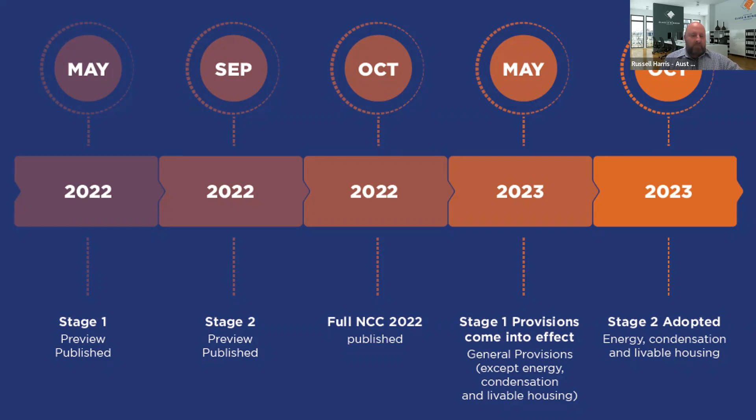So it's currently available and can be downloaded from the Australian Building Codes Board's website. The transition plan agreed on by the state ministers was for an implementation, or mandate, coming into effect as of 1st of May for all provisions except for energy, condensation, and livable housing. Those elements would have a delayed adoption to the 1st of October 2023. So effectively a 6 and 12-month introduction. Now, that's not to say they can't be used at this point. NCC 2022 is in effect, but it's not mandatory. So the easiest way to say it is compliance with NCC 2022 at this moment is voluntary, but will become mandatory as of the 1st of May, at least according to the building ministers meeting.

But Australia is based on a federation, which means we have 3 levels of government: federal, state, and local. And the National Construction Code is brought into effect by state legislation. It's not a federal document, even though it's called the National Construction Code. It's brought into effect by state legislation and can be varied by state. So what we now have is a federal transition plan, but we have state variations or state announcements as to what their intentions are.

So what you can see here is that Queensland and Victoria have gone on the record and announced that they will adopt the national plan, so 1st of May adoption for all of the general provisions. We've called them general provisions because it's too hard to say everything but condensation, energy and livable housing. So the general provisions is in May, and the 3 elements, condensation, energy and livable housing, in October. New South Wales is following the same plan, but has opted out of the livable housing provision, so they will not be adopting livable housing in NCC 2022 as a state variation.

Tasmania have a similar kind of variation. They will also adopt the general provisions in May. The condensation provisions will be adopted in October as per the national plan, but there will be a further 12-month delay on the livable housing, so October 2024, and they will not be implementing the energy efficiency provisions.

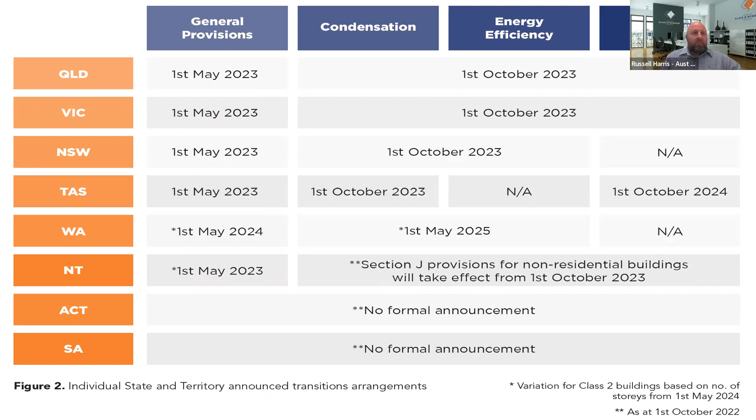So what are the key changes? The first thing you notice is that there's 2 new books. The NCC itself is still 3 volumes - volume 1 and 2 making up the Building Code of Australia, and volume 3 being the Plumbing Code, not of any significance to us. But there's 2 new supplementary standards: the first one's called the Housing Provisions Standard, and the second one's called the Livable Housing Standard.

You've heard me talk about the implementation of the livable housing, so we'll work through what the requirements are in each of those. With regard to the housing provisions, the Housing Provisions Standard is all the stuff from volume 2 that was very prescriptive - all the diagrams, the illustrations, the recipe-type provisions - they've been moved out of the National Construction Code into a separate standalone document called the Housing Provisions Standard. So basically not everything, but the majority of Section 3 from the old 2019 has moved out to a separate document, and we now have NCC Volume 2 as Section H. It's no longer referenced as a 1, 2, 3 - it's now Section H, nice and easy to remember because H is for housing.

Within that, we've also got what the ABCB call the SPTC referencing structure - a new clause nomenclature. We used to have F1.6 or B8.9 and so on. There's now 4 digits to every clause, and it sounds a bit R2D2-C3PO-ish, but every clause has a specific reference structure that tells us quite a bit of information. One thing to note is in NCC 2022, on the right-hand side, you can see the previous reference - this particular clause is now F6D3, previously known as F6.2.

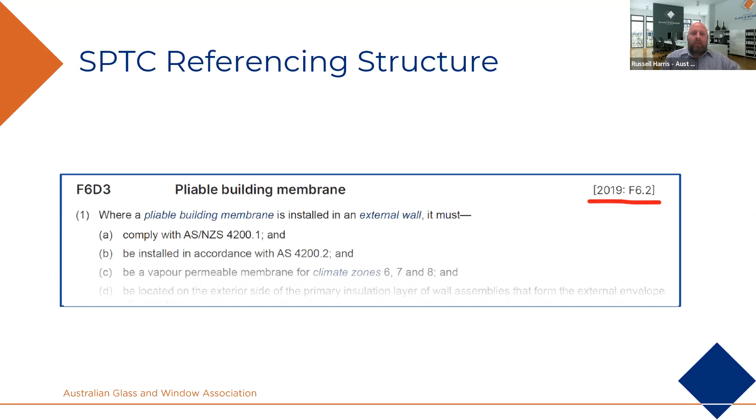So what does SPTC stand for? Section, Part, Type, Clause. The section's fairly straightforward - we all know what sections A, B, C, D, E, F, G, H, I, J all are, and section H is now the housing volume, the bulk of volume 2. The part is just the part numbering, so that makes sense. The type is a new addition - that's the bit that's most valuable and newest. It's basically that you can be O, F, P, V, D or G. The most obvious one is P, which stands for a performance requirement.

So this is the mandatory thing that you have to meet. Anything that has a P there is the governing principle or the requirement. A D indicates a deemed to satisfy provision, so we know that's a deemed to satisfy solution. Having that clarity to differentiate what is a performance requirement, what is a DTS solution, what is a verification method - these are all very important things that were kind of unclear under the old structure. So it's good to have that clarified. And the clause is obviously just the specific clause referenced.

So this is quite a powerful kind of nomenclature. It does make sense once you get used to it, but it does take you a little bit of getting used to.

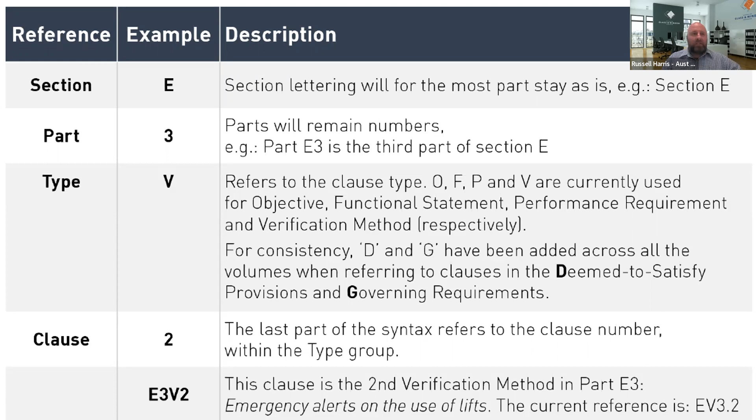Other than the general principles or things that have changed everywhere, there are 3 specific areas. We want to start with livable housing because that's not being implemented in every state, but it is being implemented in most states.

It invokes a couple of changes to be aware of. The first one is in terms of application. Livable housing by definition means a dwelling - it's applicable to Class 1A buildings or houses and Class 2 sole-occupancy units. There are already accessibility requirements that relate to other building classes, but livable housing relates only to these 2 classes of buildings.

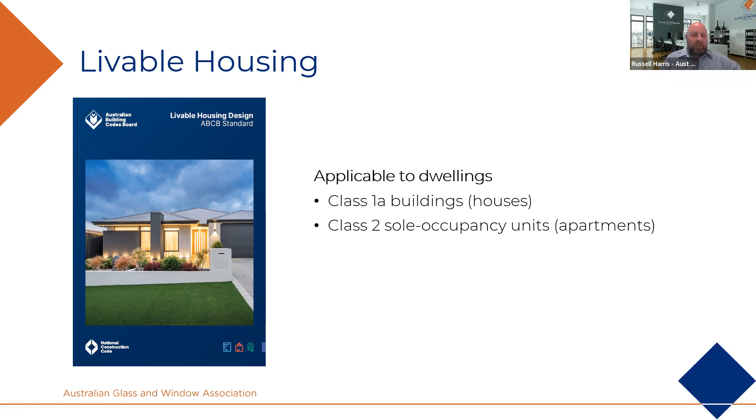The first and most notable requirement from livable housing relates to a step-free entrance - fundamentally the threshold. In every dwelling that's not exempt (there are some exemptions from the livable housing provision), the livable housing provisions require at least one step-free entrance into the dwelling. That means basically from the front boundary of the property right through to the internal of the home needs to be step-free, so someone can access the home without having to step up a step or a series of steps.

That can also mean access from an internal garage within the building. So if it's not practical to have the front door accessible, an internal access door would suffice.

The requirements relating to that step-free entrance - and there only needs to be one - is that the door threshold has to be level. If it can't be level, it has to have a height of not more than 5 mil, provided it's rounded or beveled. You can see the kind of language here - it's very standard-ish. It doesn't tell you how to do it, but it tells you what must be done.

If there's a rise in height, it can't exceed 56 millimeters, and the gradient for the threshold needs to be no more than 1 in 8.

This last dot point at the bottom was added late, based on feedback from, among others, our industry, around concerns that these provisions might compromise the weatherproofing of a front door or any door. So additional concessions have been provided around a maximum 15 mil lip. The term 'lip height' isn't something we would choose to use, but it basically refers to a vertical height of no more than 15 millimeters, where none of the other options meet the weatherproofing requirements.

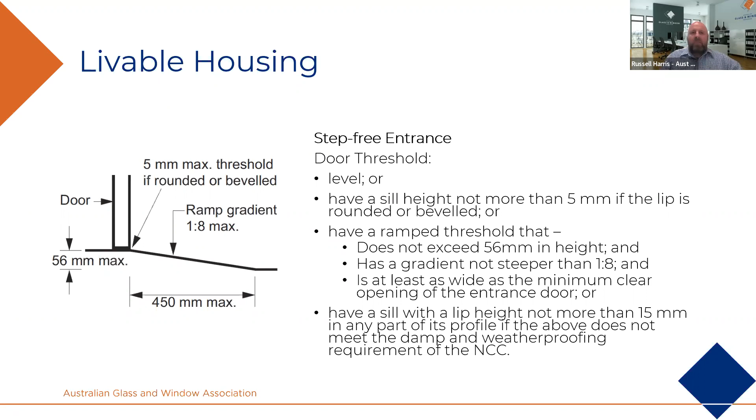The other notable thing about a step-free entrance is a minimum clear opening width of 820 millimeters. That doesn't mean an 820 mil door - you'll need a larger door because you need to account for the hinge, the thickness of the door panel, plus any hardware and protrusions of the jamb. So generally speaking, probably an 870 minimum door, but it's important to verify that.

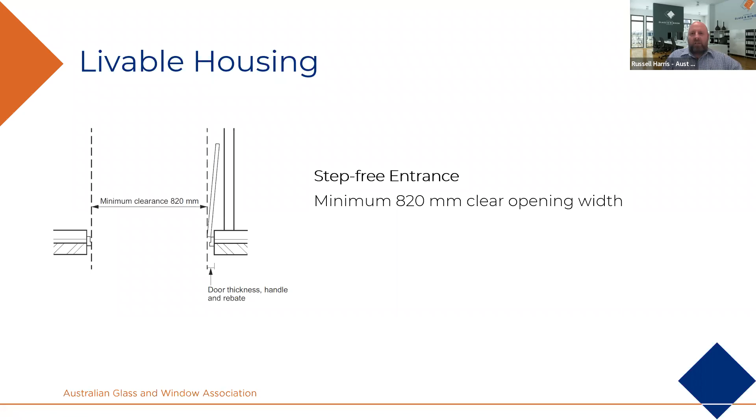One thing we've had clarified - it's not represented in the livable housing standard, but has certainly been communicated to us - is that this doesn't include the door furniture or door handle if the door is able to open past 105 degrees. In this drawing, you can see the door laid back against the wall a little bit - where you can open the door past the 105 degree mark, you don't have to account for the door furniture.

The other thing that's been added, post-public comment, was with regard to the weatherproofing of the opening and a requirement for a threshold grate.

This is the illustration that's been included. We have raised some concerns about this, mostly with regard to the size. A 200 by 150 mil drainage channel is huge. It's the sort of drainage channel you'd see in a Westfield car park, to be honest, not necessarily across the front door of a home.

But this is the requirement that's been drafted and now enacted into the National Construction Code. So yet to see the impact of this, but other than the overall size, the grate requirements are somewhat consistent with 1428.

The other thing is, other than a sliding door, it's not common for the window or door supplier to provide the drainage grate. So this may or may not affect us, but that depends on the business model and the products in question. Something to be aware of, and keen for feedback if this affects you, and what messaging and response we can take to government in response to this provision.

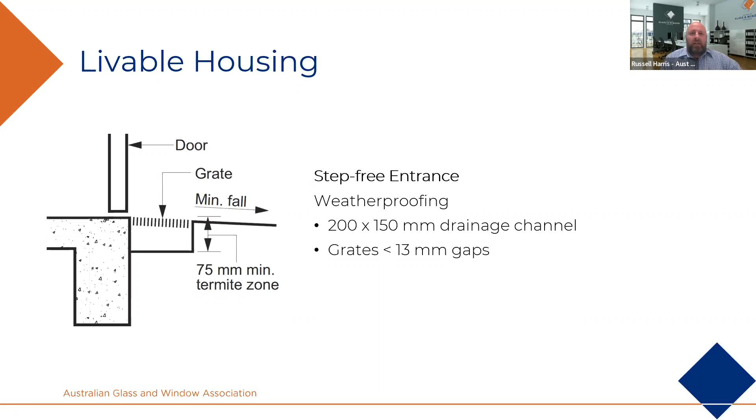As I said, it did come in quite late and without notice. The other part of the livable housing provisions or standard relates to the shower. So there's really only two parts that affect us, the step-free entrance and the shower.

And the requirements that relate to a shower, we did have originally in the first draft a requirement for the door of a shower enclosure to be removable. That has been taken out in response to the feedback the ABCB received, notably from us. But the hobless and step-free entry has remained.

Now, there's no requirement for it to be a downstairs shower. It just says at least one shower in the dwelling. It can be a source of confusion if someone who has limited mobility is able to navigate 17 rises in a flight of stairs, but can't step over a 5 mil lip into the shower. But nonetheless, these are the requirements.

So at least one shower has to have a lip height of not more than 5 millimeters, and that's hobless, step-free. So the inside and outside needs to be the same height with no hob in between, or at least not more than 5 millimeters. Really important to note. And again, it likely doesn't affect us too much, but like all things, we're going to get caught up in it.

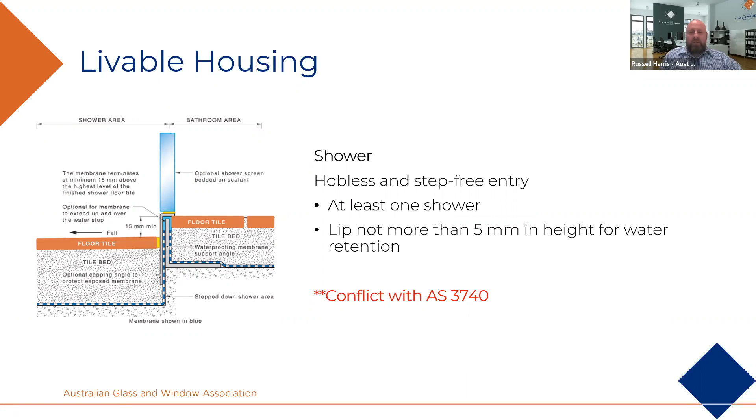Again, we're going to come in and put a shower screen on top of whatever they put down before us. So presumably it's not going to affect us too much, but it'll be interesting to see how this plays out, and likewise interested for feedback on how this may be affecting you.

Aside from livable housing, probably the next biggest change is energy efficiency. I think Clinton's going to talk later in the presentation more about some of the impacts we're seeing in some of the studies and investigation we're doing to try and understand exactly what 7-star means in each climate zone.

But generally speaking, NCC 2022 introduces a 7-star stringency level, so that's a 1-star increase from the previous. To unpack that a little bit, we need to look at the two different volumes. So we'll start with Volume 1, which is commercial buildings.

In NCC 2019, the only pathway for Class 2 single occupancy units is an energy rating or a NatHERS assessment. So there's no other pathway available currently. So that's quite restrictive, I imagine.

So a lot of the changes with regard to the commercial side of things, with regard to Class 2 apartments, is to introduce the other pathways that are available for pretty much any requirement under the National Construction Code. So basically we have performance solution versus deemed-to-satisfy solution.

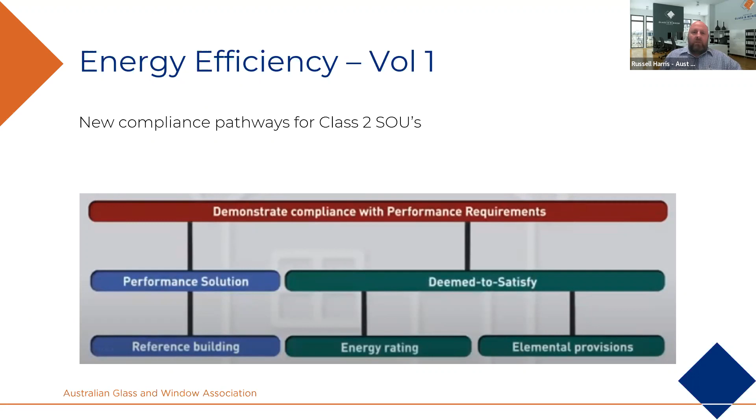I'm sure most people would be familiar with this. As it's applied to energy, performance solution generally invokes a verification method, or in this case, most commonly a reference building. The deemed-to-satisfy solution includes new provisions for elemental provisions, so kind of prescriptive building block type solutions. Those are the two areas that have been introduced, and I'll go through each individually.

So starting with the verification methodology, verification using a reference building - get used to the J1V5 reference. I imagine this method has proven quite attractive for ESD consultants in the commercial space, and it's reasonable to expect it'll be similarly popular for ESD consultants designing apartments. So we expect this to be used a fair bit.

The idea of a reference building is that you build a building that complies with the elemental requirements, and then you design your building to achieve that or better. But it gives you a lot more flexibility to mix and match and try different things. In the development of the verification methodology, the ABCB and the working groups we participated with were very, very careful to eliminate opportunity for gaming.

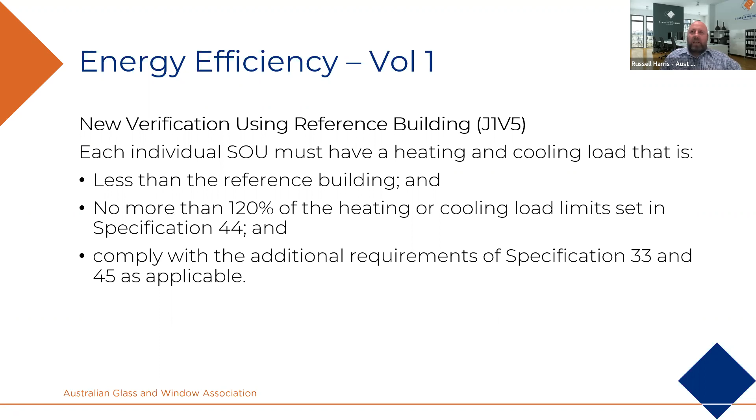The verification methodology is prone to gaming. It can be misused, so there's been a lot of effort put into the specifications that support it. Primarily, the specifications dictate a minimum stringency level equivalent to 7 stars, while allowing flexibility to design your building as you see fit. This doesn't necessarily directly involve us or change how we do business. We're still going to get specifications in terms of U values, solar heat gains, and so forth.

This is more about how those numbers are derived or how the building assessment is undertaken. Similarly, the elemental provision, the opposite end of the spectrum, is an algebraic equation that defines energy efficiency performance stringency levels. It's complicated, basically complex. This is the winter formula. If you want to game it, have a go. For us mere mortals, we'll probably sit back and watch, but there are a few notable factors in there.

One of them is that the windows in bedrooms and living rooms are treated differently, based on their occupancy. Bedrooms are typically inhabited at nighttime, so the solar gain is not as consequential to the overall energy use of the building or unit as it is for living room areas, for example. The color of the window frame, like the wall and the roof, can make a big difference to the energy performance, so that's taken into account.

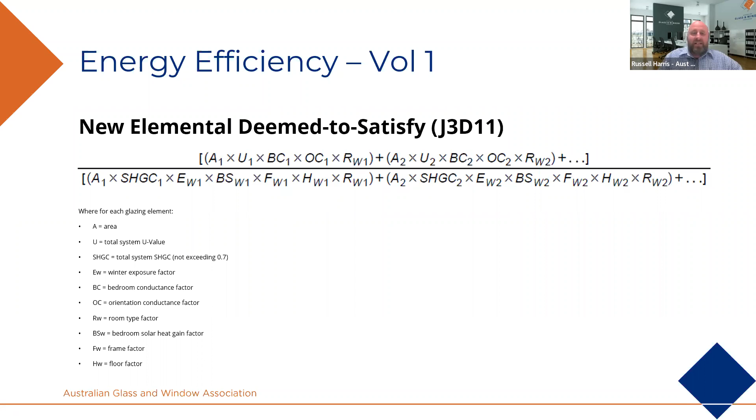And also the orientation factors - I can't remember what they all are, but it's a complicated formula and I'm not going to go through it right now. I don't pretend to understand everything in there exactly how it works, but it has corresponding summer values - this is the solar heat gain values. Again, it takes into account the room type factor, which is its use factor, the frame factor, and the floor area factor.

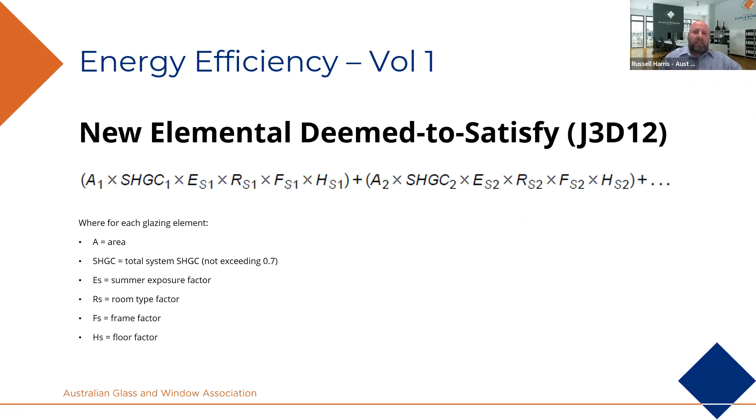In terms of volume 2, we had a pre-existing VURB, so there's currently a verification using reference building method available in 2019. It's not changing - the VURB itself isn't changing. What is changing is the increase in stringency to a 7-star equivalent, but also a tighter specification of what the reference building has to be. Fundamentally, the reference building now needs to meet the DTS provisions, and that's something that was not well aligned in 2019.

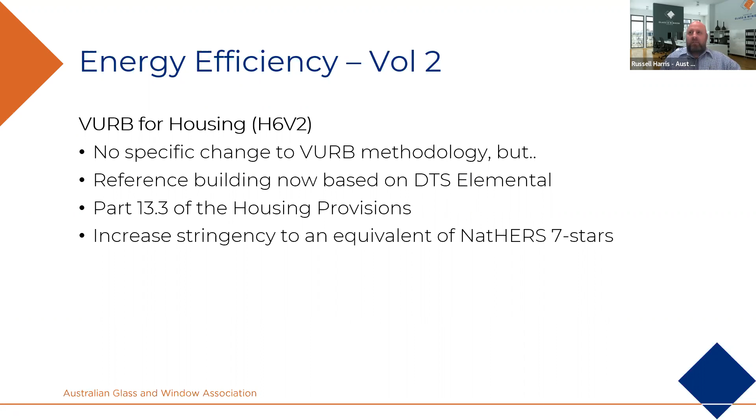So that's the improvement there, I suppose - the expectation is that buildings designed to a reference building will be much closer to either the elemental provisions or the NatHERS assessment than they were previously. That can mean a fairly sizable stringency increase for some jurisdictions where the VURB has been the preferred methodology over NatHERS.

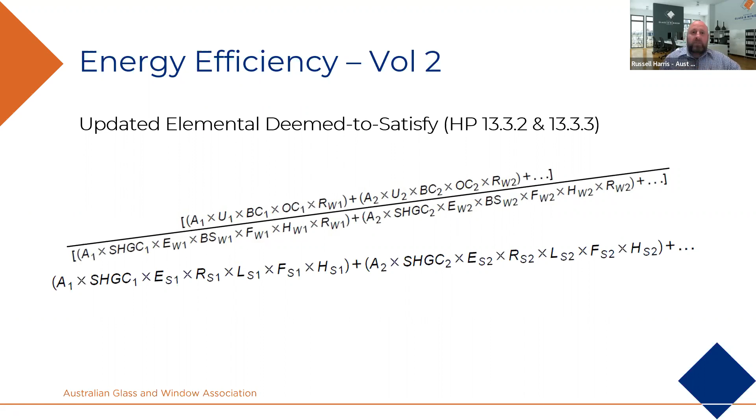Likewise, the elemental provisions have been updated - again, a whole heap of algebra and specifications there. We don't need to know all this sort of stuff; this is just how the numbers are calculated and determined by ESD consultants. The important factor is that the outcome of these formulas increases stringency to 7 stars, above the current stringency level of 6 stars. What exactly that means will depend on a whole heap of factors that Clinton's going to discuss coming up.

As for the general provisions or other matters, there are a number of corrections or improvements that have been made. One of the most notable is the inclusion of aluminium and construction packers in the exempt building elements under C2D10, the old C1.9. This refers to non-combustibility of walls and their components in Type A and Type B buildings. Previously, aluminium was not listed as an exemption, so we had to prove that aluminium didn't burn. Likewise, the packers we commonly use in installation are flammable, but very low mass and inconsequential to the fire protection measures or intention behind the wall, so they've now been exempted.

Really important - we're going to share more information on this, with better detail in a fact sheet in the next few weeks. But an important thing to note regarding balustrades is the face-mounted type. There was a misinterpretation or loophole in the previous provisions where the 125 millimeter maximum gap applied equally to any gap. This could lead to a standout face-mounted balustrade being stood off the face of the slab by 125 millimeters, creating a 125 millimeter gap straight down.

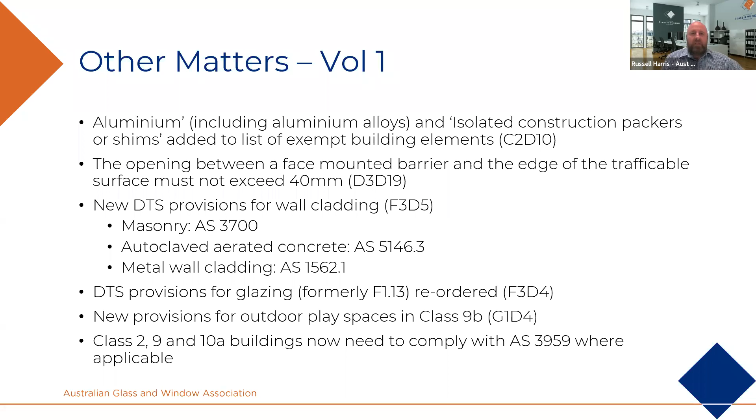In volume 2, so housing, there are some new installation details for solid core masonry. So this is single leaf. This is mostly going to affect I guess the far north Queensland style construction, Townsville, Cairns, so forth, where we have sort of solid core or single leaf masonry construction as the most common or typical construction methodology. Pretty much aligned with standard practice. I don't think that invokes any significant change. I think it's just more a formalisation of what most people are doing anyway, hopefully. They're certainly consistent with the advice that AGWA has provided in the past.

We have some new provisions covering the installation of windows. Again, they should be nothing new. These are all fairly common sense, straightforward things that relate to minimum gap criteria, transfer of building loads, flashings, things like that. They're general requirements that would apply to pretty much any installation and represent good building practice.

The glass selection provisions, particularly, so what is currently part 3.6, which is now moved to HP or housing provisions 8.3.3 and 8.4.2. These elements relate to glass selection. They're not new, they are currently in 2019 under part 3.6, but they have been modified and the objective behind that modification is to align them with 1288. There's been some discrepancies between 1288 and what's in the NCC in the past, and we've worked with the ABCB to correct those. We've been mostly successful. There's still a couple of anomalies, but largely inconsequential.

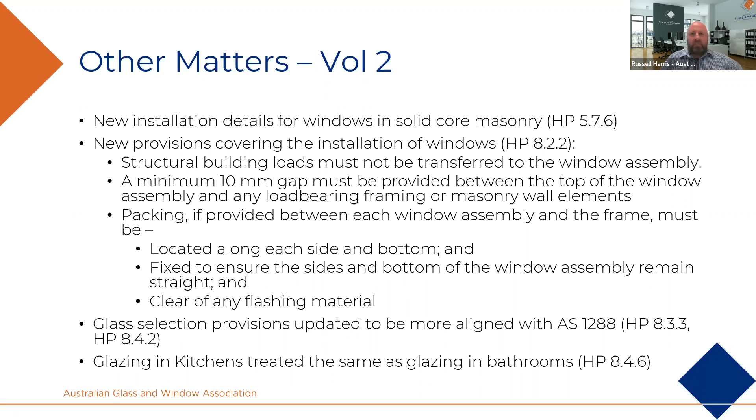This table illustrates the affected standards. What you can see is there are 5 standards, all of them with a 2021 revision - so all of these standards have been updated. The black sheep amongst them is AS 1428, Design for Access and Mobility, the disability standard. It does have a 2021 revision published, but the NCC will not be referencing the most recent revision - it will reference the 2009, the pre-existing standard revision. So that's largely inconsequential for us, but notable nonetheless.

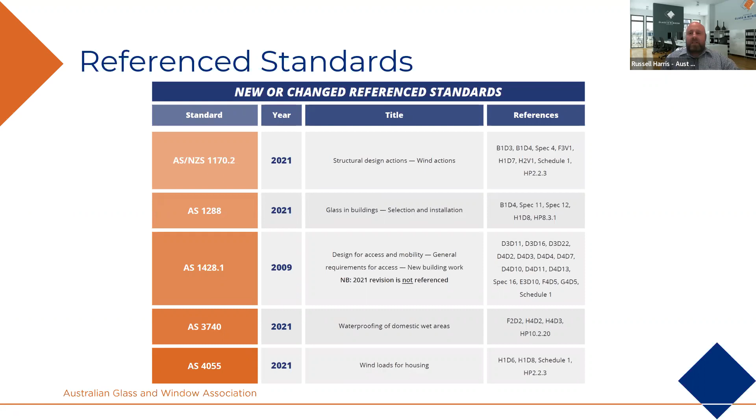With that, I'll hand over to Poya to talk us through some of the changes that have occurred in these standards. Thank you very much. Thanks, Russ. Good afternoon, everyone. My name is Dr. Poya Abtahi, and thank you for listening to this part of the presentation.

In this part of the webinar, I'll provide a brief update regarding the standards related to glass, glazing, and window industry that have been updated and referenced in the NCC 2022. As you know, AS 1288 as a deemed-to-satisfy (DTS) solution provides requirements for the selection and installation of glass products in buildings. The 4th amendment of this standard, the 2021 version, was revised and published last year, in June. The main difference between the 2021 and 2006 versions is section 6 and 7, which cover sloped overhead glazing and barriers or balustrades - these are the focus of the changes. If you're not in either of these two spaces, there will be no real effective changes for you.

The main benefit of this revision is the usability and also the new scope. For example, for section 6, overhead glazing, further clarification was provided on imposed live load requirements for overhead glazing with both less and more than 30-degree slope to the horizon. In this version, assessment of wind load on overhead glazing as a DTS solution is also included in new tables.

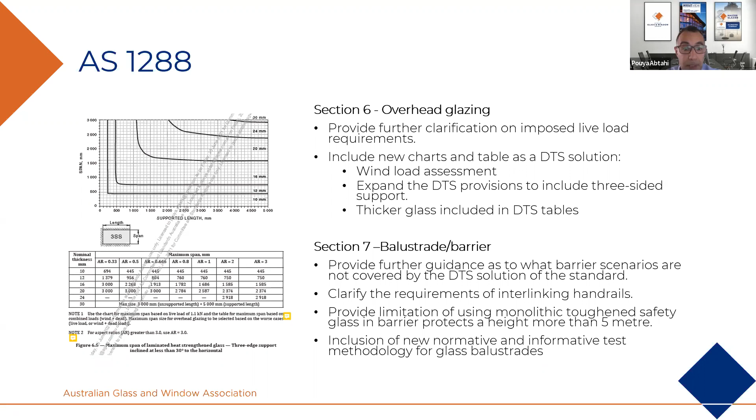New provisions to restrict using this type of glass have been added. We also added another clause about requirements of a structural barrier protecting a height more than 1 meter, referencing the appropriate test methodology to provide industry with a simple, accessible, and uniform prescriptive measure for barrier product testing. So I firstly encourage you guys to update your copy of the standard and familiarize yourself with the new provisions.

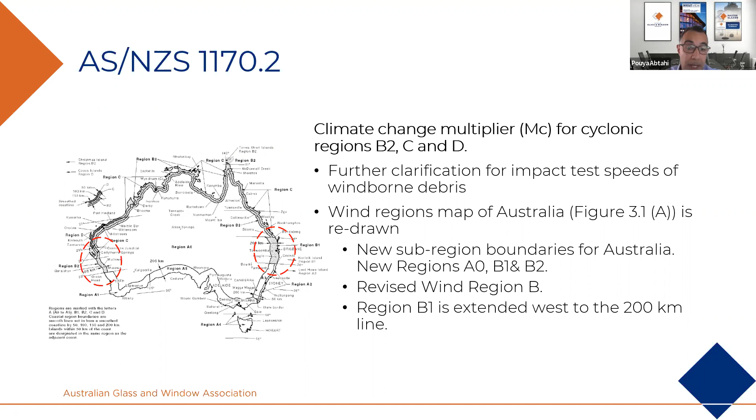Factors FC and FD for cyclone regions have been removed from the previous edition of Table 3.1. Regional wind speed for region C has been reduced by almost 5%. Wind direction multiplier, called MD, has been revised for all regions in Australia and New Zealand. Another notable change is the removal of TC 1.5, terrain category 1.5.

This means that all water surfaces would fall under TC1, terrain category 1. Therefore, as per the requirements, open terrain with few or no obstructions and all water surfaces, including rivers, canals, bays, lakes, and ocean, fall under TC1.

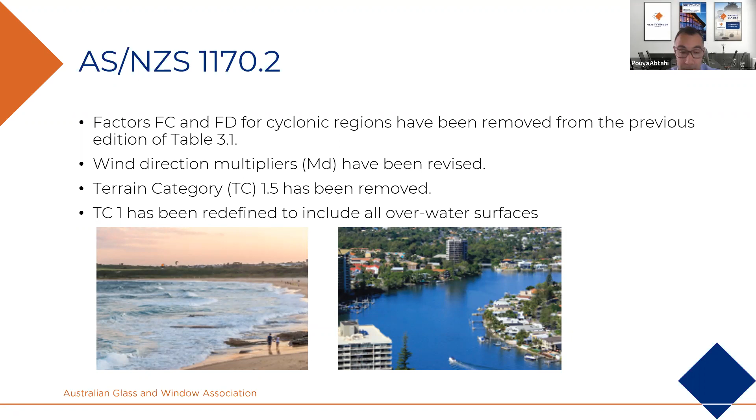When it comes to wind load assessment for a building, we tend to refer to either AS 1170 Part 2 or AS 4055. AS 1170 Part 2 is the primary wind load assessment standard, and AS 4055 is a simplified version of it, used especially for determining wind rating for housing only. Like AS 1170 Part 2, AS 4055 has also been revised last year. A lot of content in AS 4055 is reproduced from the scope of the 2021 version of AS 1170 Part 2, so they pretty much have the same scope.

One of the major changes we'll notice is that the map of Australia is also redrawn in the AS 4055 2021 version. This means region B has extended 100 kilometers inland on the east side of the country, around south of Queensland and north of NSW, and also extended further south on the west coast. I've highlighted both of these areas in red in the image. We do not have region B1 and B2 as per AS 1170 Part 2, so the map in AS 4055 is slightly different from AS 1170 Part 2.

So any development in this area will see an increase in wind load stringency. In some regions of Queensland, the wind load is going up by around 80%. That's a fairly big jump, and it's very important to understand, because it does change the outcome of the equation when you put the new numbers from the new tables in the 2021 version.

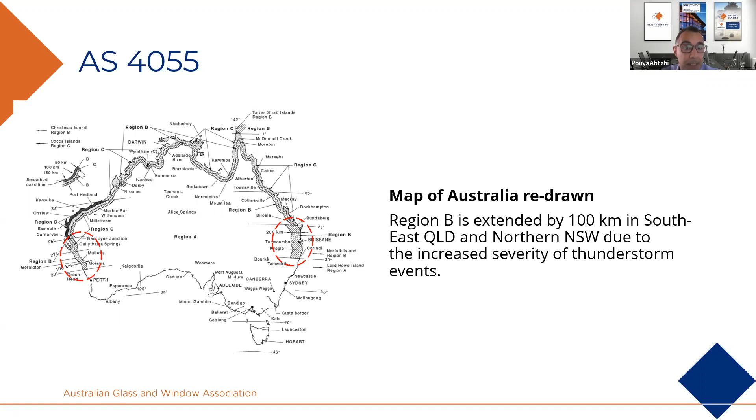Same as 1170 Part 2, TC 1.5 has been removed. Anything that was TC 1.5 is now considered TC terrain category 1, which includes enclosed and unenclosed water bodies. That's another small but significant increase in stringency, which coupled with regional mapping could mean the wind rating of many houses increases from N2 to N3, and in some cases from N3 to N4.

Further clarification of the shielding parameter was also provided in the 2021 version. If you have any questions in this regard, please contact us. We do have an in-house training course for 4055 and also the 4055 calculator, which helps with assessing a wind rating for housing.

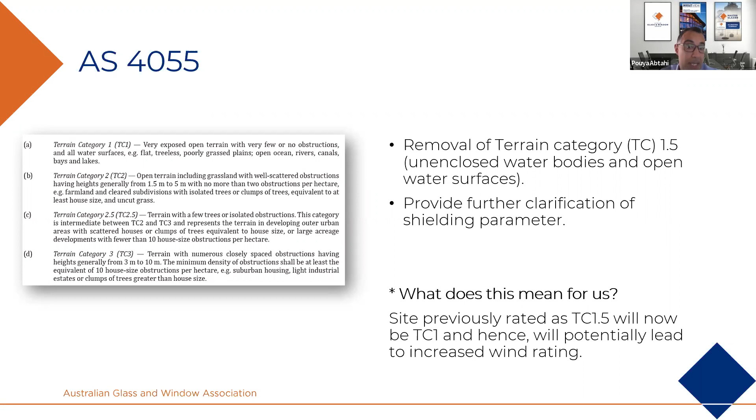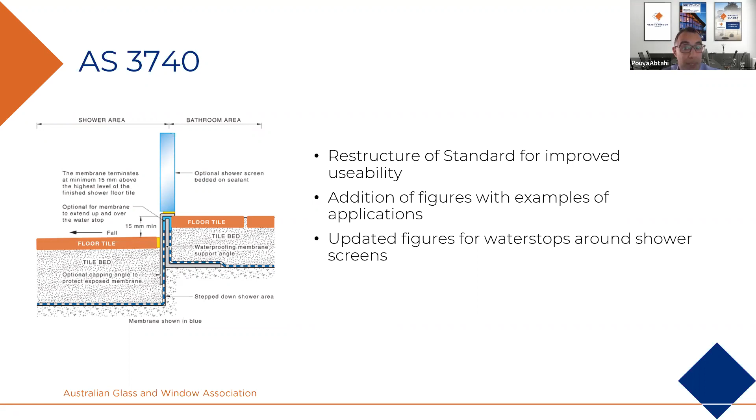We also have an updated 3740, which is about waterproofing of domestic wet areas. This standard was revised and restructured last year, mainly to improve usability. Additional figures and clear drawings were added in the new revision with examples of different applications. The water stop around enclosed and unenclosed showers has also been updated.

In response to the recent revision of 1288, 1170 Part 2 and 4055, we've developed 3 technical fact sheets to inform members about the critical changes in the standards that will come into effect, in line with the guideline Ross mentioned earlier. The fact sheet related to AS 1288 provides details of all changes in sections 6 and 7 regarding barriers and overhead glazing, and we have 2 fact sheets for 4055 and 1170 as well.

I highly recommend downloading the fact sheets from the AGWA website and familiarizing yourself with the new changes. As always, if you have any questions about what has changed, please feel free to contact us. That's the end of my presentation today, hope you guys enjoy, and thank you for your attention. Over to you, Clinton.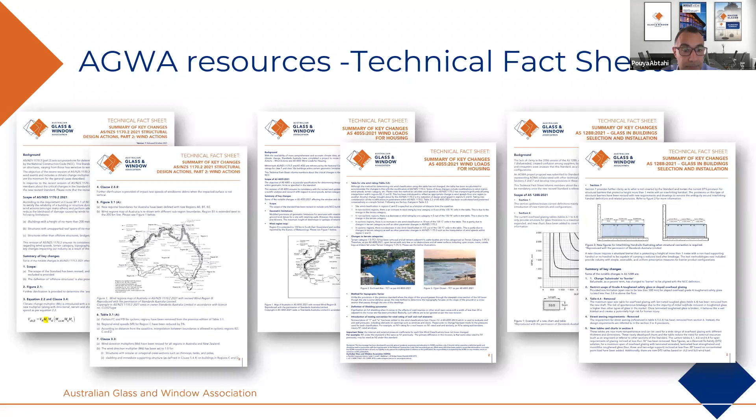Thanks, Pouya. Lots to take on board there.

What's of interest to everyone is that we've been quite busy, and there's been a lot to digest, but we've also been working through what these changes mean, particularly in the energy efficiency space. We're in the middle of a project at the moment looking at our energy efficiency. Let's go to the next slide.

The project is looking at a number of key centres around Australia. You can see this map at the moment - we're looking at modelling what 7 stars looks like in each of those key capital cities as well as Townsville. To complete that modelling, we've commissioned the design of a single-storey 3-bedroom house and a double-storey 4-bedroom house to give us some indicative ideas of what these changes mean. We're halfway through that study and will probably organize another webinar in the coming month to go through the impacts in the different zones.

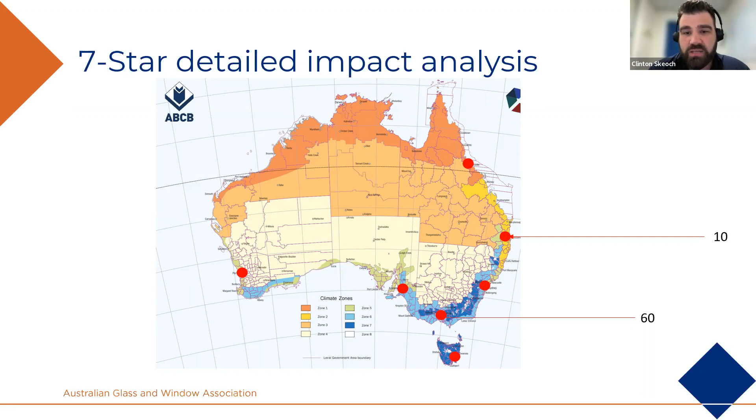As you can see, covering most of the capital cities, there are quite a large number of variables at play. As Russ outlined, if you look at the next slide, there are a lot of changes and the adoption frameworks vary, but also the stringency varies. In the ABCB model on the map you saw before, there are 8 climate zones.

On top of that, when you look at the NatHERS compliance pathway, we have quite a large number of climate zones that have their own energy target. If we look at what 7-star means - take climate zone 60, which is Tullamarine in Victoria - under 6 stars it had a requirement of 138 megajoules per metre squared as the old 6-star energy target to get below. At 7 stars, that target is now reduced to 99 megajoules.

But not only do you have to get under the 99 megajoules, you also have to make sure your heating and cooling loads are below the individual heating and cooling targets. Now, on face value, many of you would think the heating and cooling targets combined would give you the total for 7 stars. That is not the case.

What we found when we originally modelled it during consultation - climate zone 60 as an example - had an 82 megajoule target for heating and a 22 megajoule target for cooling. What we found through modelling, and others found too, was that this was quite a high bar to get under. So not only did you have to get under your 99 megajoules, but no more than 82 megajoules could be used for heating, particularly in Victoria, which is a heating-predominant climate. A lot of houses were actually having to go up to sometimes 7.6 stars to pass the individual heating target, and so the ABCB took that on board.

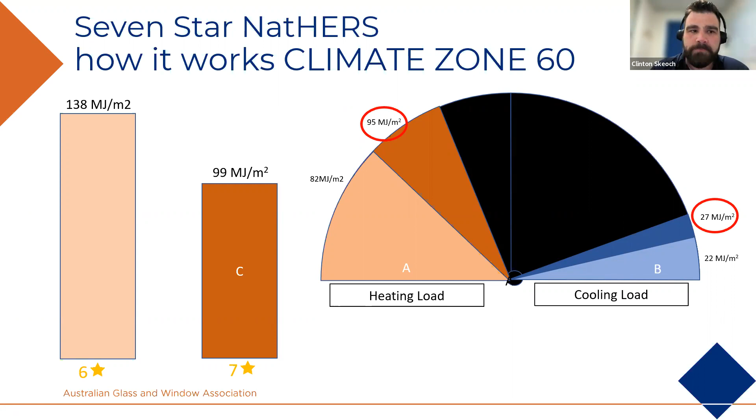When we look at 7-star in Tullamarine, we've modelled what 6-star looks like. Bear in mind, there is a lot of variation in terms of the orientation. This house in particular, which we've got our family of 4 with a dog, this is the worst orientation, or the specification in the worst orientation. What we find in the cooler climates, or in this house in the cooler climate, being Tullamarine, is about a 0.3 to a 0.4 star variation, depending on which way it's orientated. And quite a lot of change in the specification.

You'll see here that at 6 stars, it had a roof blanket of 1.38. It had R5 insulation in the roof - that's had to increase to R6. It had 900 and 1200 diameter fans - they're now at 1200 and 1400. The underfloor on the second story insulation went from an R3.5 to an R4. There was still internal insulation between the unconditioned areas like the garage wall or laundry walls.

The roof went from a tile mid-color to a dark colored Colorbond, trying to harness that solar heat radiation. The external walls went from 2.5 to R2.7. The underfloor concrete insulation increased to a 375 waffle pod. The downlights in the house had to go to IC4. All of you going, what is IC4? IC4 is basically a make of downlight that allows you to put insulation over the top without burning the house down.

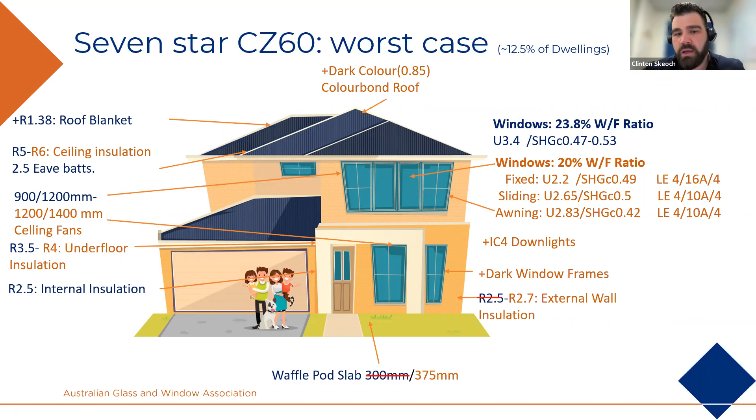However, if we look at the next slide, if we look at what we're currently seeing in the CSIRO data portal, you'll see in blue is the current specification for 6 stars, and in orange, the current specification for the small number of houses that are currently being built at 7 stars. As you'd expect, the U value peak moves closer to that sort of U value of 3, and the SHGC drops along with that performance and the availability of the glass for many of those products.

This doesn't show that impact that we just saw in the previous model in terms of the mid 2s in glazing performance. And that is driven in large part by what we found in trying to work out what's going on - you'll see in the bottom left-hand corner that currently Victoria is only modelling shading into NatHERS in 7.83% of houses. Now, if you take the NatHERS rules requiring you to effectively model a house with the shading of the neighbours that are in place, or if you don't know the neighbours, you have to assume that your house is next door with the same offsets and heights. It's clear to say that there's actually quite a large amount of under-compliance when it comes to the energy rating itself driving this demand.

So if you were asking what does a 7-star look like in Victoria as an example, from what we're seeing at the moment, we're probably more in line with mid 3s. If the compliance is really pushed quite heavily, you're going to be seeing certainly your 2-story houses moving to that mid 2s area, potentially low 2s, depending on the design and layout, and certainly an increase in the stringency required. It's not in line with a lot of the consultation that we did, and a lot of it relies on what the market is seeing.

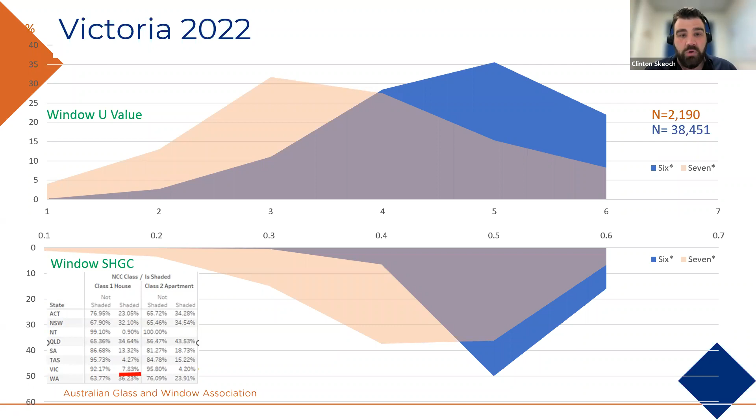Equally, if we move to the next slide, when we move up to Queensland, so climate zone 10, the worst case scenario once again. Before, when we were talking about Victoria and orientation, we had about a 0.3 or 0.4 variation depending on which way it was facing on the block. We actually see this house having a 0.7-star variation when you move to Queensland, depending on its orientation. Once again, you can see those highlighted by the orange.

There aren't actually a lot of changes. This house at 6 stars is pretty standard. The shale grey roof colour. It's important to note the role of window and roof colour in the new 7-star. It actually plays a meaningful and cost-effective role in, I guess, basically delivering compliance.

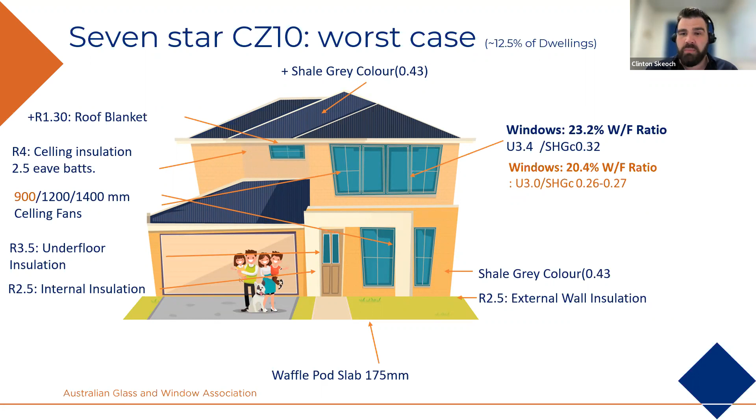We haven't done the modelling in this, and we'll certainly be going into more detail when we do the individual analysis in about a month's time, but it gives you an indication of the stringency. Many of you are sitting here, if you look at the next slide, saying, I'm not seeing those windows in the Queensland market. What we are seeing is most of the windows, both 6 and 7 star, are a majority above 5 U value.

And equally, the SHGC is not what you'd expect in Queensland. In fact, what the data from the CSIRO tells us is that for the houses that have used NatHERS, and you can see there's not that many compared to the Victorian modelling, it's probably about 6 or 7, maybe about 10% of the Victorian numbers modelled. What we are seeing is that the SHGC isn't as low, so where you'd see more low-E coatings and more tinting isn't necessarily being lived out by these numbers.

But you are seeing the role of increased shading. You can see here in Queensland, 34% of the houses are using shading because it actually helps them in their modelling, we're looking at 7 star. I see no reason why everyone won't be applying shading to their modelling, because it's basically a free kick in the modelling process in terms of the specification.

Equally, what we believe may be going on, and why we're seeing such high U values in the Queensland market, is the role of ventilation. I know there aren't a lot of awnings sold in Queensland, but as an example, what we do find is when you apply the role of restrictors on the 2nd story, particularly of our 2-story building, the impact of the restrictor actually changes the heating and cooling dynamics of that building quite considerably.

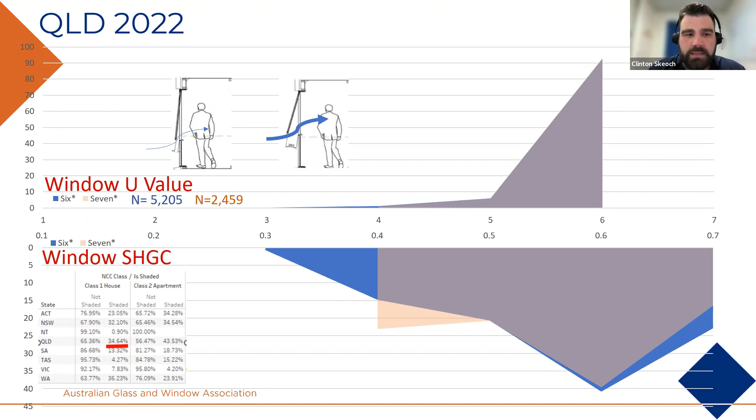When we look at BASIX, we've done a bit of analysis to sense-check the BASIX challenges. The heating and cooling loads, as you can see here, for Boggabilla and Goondiwindi, and Albury and Wodonga, aren't perfectly aligned even though you can probably reach out and touch each other across the border. But they are pretty much close to each other in terms of impact on the modelling, so we don't see a huge variance sitting inside the BASIX modelling as it currently stands.

We're looking forward to getting a go at the new BASIX DIY sandbox that's out - it hasn't been released yet. But all indications at the moment from the more thorough BASIX tool are that it lines up reasonably well with NatHERS and what we expect there.

It's important to note that currently climate zone 46, which is the area just north of Tea Gardens in New South Wales heading up the coast, and the Coffs Harbour to Grafton area, and the light green area further north - climate zones 9 and 10, up into Byron Bay and Lismore - plus two pockets close to the border, are all currently excluded from the 7-star trajectory. So they won't have a requirement to move to 7-star; they will stay at 6 stars.

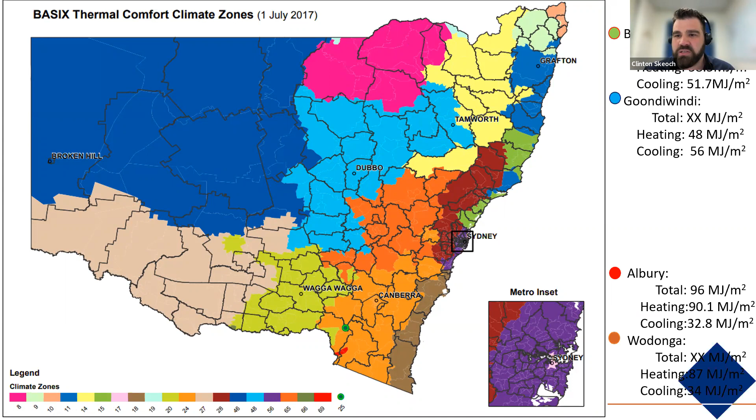As more information becomes available, certainly with the DIY tool, we'll be testing that to provide guidance to members. I'm aware that the New South Wales government has started consultation on that.

Whilst we're outlining 2022, it's worthwhile noting we've been working on NCC 2025 for over 6 months. We've managed to get a seat on the Energy Efficiency Committee, which is focused this time on commercial - not saying residential isn't within scope, but the key focus is commercial energy efficiency changes.

We've also got a seat on the condensation working group, which is really important, particularly when you've got jurisdictions like Tasmania articulating that one of the reasons they haven't adopted the energy efficiency measures is because of the ambiguity or unknown impact of condensation measures on their building typology down in Hobart. So a lot of robust discussion happening in that area.

The other working group we're on is the external envelopes working group, particularly around weatherproofing and how it applies both in the residential and commercial context. So if you've got any thoughts around those, now is the time to engage with our technical team. If you've had examples of issues from buildings you've worked on, or examples that would help us articulate an improved position for our industry, the team is ready and waiting to hear, to make sure we're presenting as thorough a picture as possible to shape the incoming changes.

Outside of that, we're working on updates to 2208 and hope to get that referenced for 2025. There's the 1170 Part 2 additional changes, there's 4055 changes, and we're also putting in a proposal for change for 2047 to hopefully get referenced for 2025.